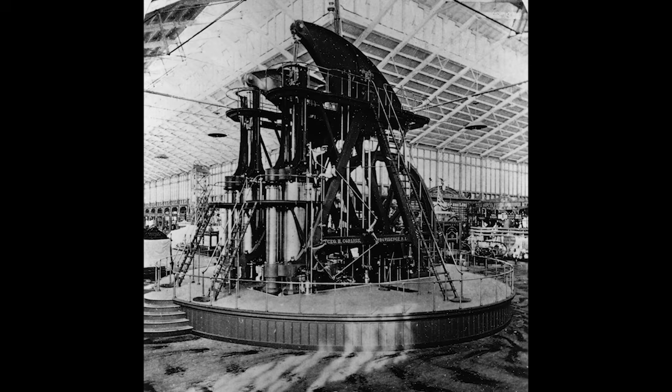May 10, 1876. Philadelphia Centennial Exhibition. The engineering specifications that European steam experts received that morning would challenge everything they believed about reliable industrial power. A 45-foot-tall American steam engine designed to operate at only 36 revolutions per minute, impossibly slow by European standards.

Through the morning mist of Machinery Hall, President Grant and Emperor Dom Pedro of Brazil approached George Henry Corliss's massive creation, while thousands of international observers waited to witness either American engineering triumph or national humiliation.

European slide valves required constant grinding against metal seats, wearing out every few weeks and shutting down entire factories for repairs. The British and German engineers scoffed at Corliss's revolutionary approach, separate steam valves that dropped shut using vacuum cushions instead of grinding metal. No European manufacturer believed such gentle mechanisms could handle serious industrial loads.

Yet this quiet former store clerk from rural New York claimed his patient, whisper-soft valves would outlast anything Europe could build. 8,000 miles from European workshops, the most decisive reliability revolution in steam power was about to reveal itself. Not through brute force or grinding precision, but through the systematic gentleness that would redefine what American engineering could accomplish.

The mechanical drawings spread across George Henry Corliss's workshop table told a story that contradicted 30 years of European steam engineering. While British and German manufacturers perfected their slide valve systems through incremental refinements, grinding metal seats smoother, machining tolerances tighter, adding more lubrication points, Corliss had reimagined the fundamental problem. His sketches revealed 4 separate valves per cylinder, each controlled by a central rotating disc he called the wrist plate, eliminating the grinding contact that destroyed conventional engines.

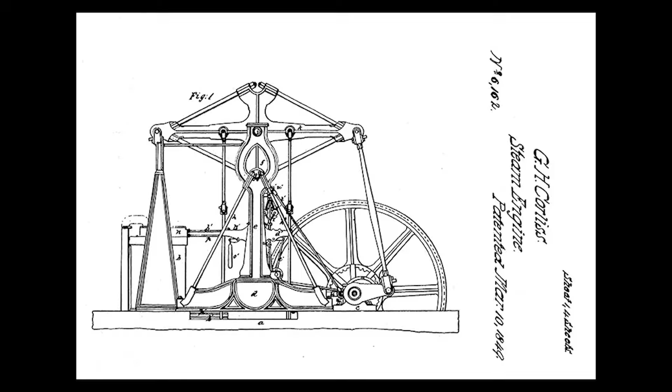The steel mill installation proved the design's scalability. For 6 months, the engine powered rolling mills, blast furnace blowers, and overhead cranes without interruption. European competitors waited for the inevitable breakdown that would validate their skepticism about American engineering methods. Instead, production reports showed consistent output hour after hour, day after day, with maintenance limited to oil changes and routine inspections.

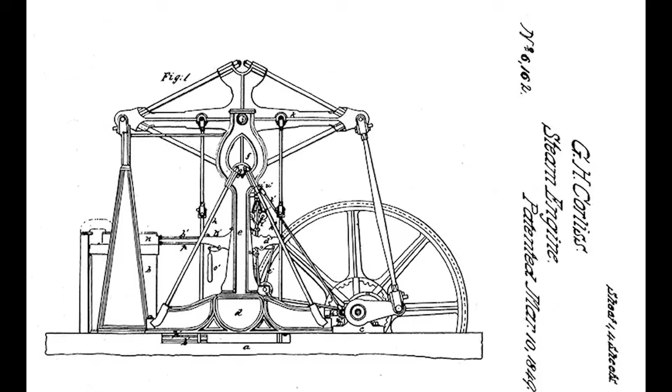The separate valve design eliminated wear patterns that required European engines to shut down every few weeks for component replacement. By 1875, the Corliss Steam Engine Company employed over 500 skilled machinists in Providence, making it one of New England's largest industrial employers. European manufacturers began sending technical observers to study American methods, abandoning their public dismissal of colonial engineering in favor of private investigation.

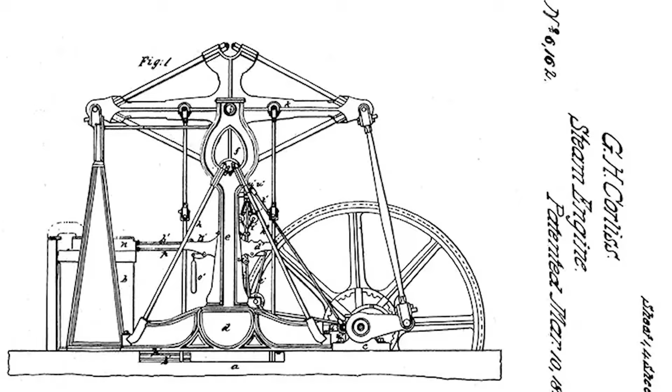The fundamental question that had driven Corliss's innovation, how to eliminate valve wear rather than simply manage it, had produced a mechanical solution that outperformed European approaches through patient precision rather than brute force grinding. The stage was set for the ultimate validation that would determine whether American engineering innovation could prove itself before the world's most demanding industrial audience.

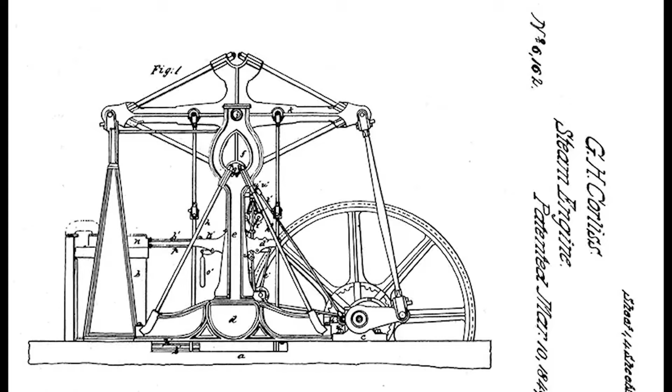The morning of May 10, 1876, arrived with Philadelphia wrapped in unseasonable spring fog that muffled the sounds of 10 million visitors converging on the Centennial Exhibition. President Ulysses Grant stepped from his carriage at precisely 10:45, his weathered face betraying no emotion as he surveyed the massive structure of Machinery Hall. Beside him, Emperor Dom Pedro of Brazil adjusted his formal military uniform, both men acutely aware that the next hour would either validate or humiliate American industrial ambitions before the world's most critical engineering audience.

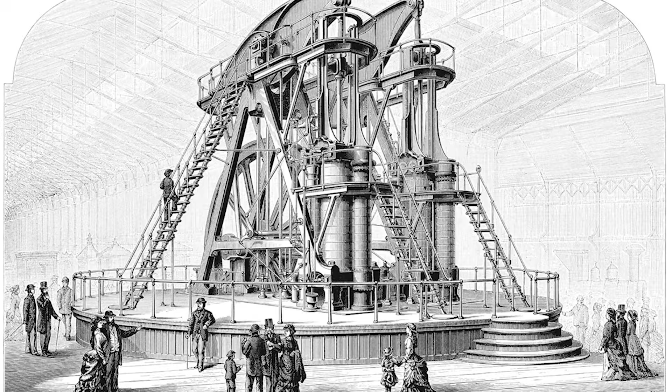George Henry Corliss stood beside his towering creation, methodically checking brass fittings and gauge readings with the deliberate precision that had defined every aspect of the engine's construction. The machine rose 45 feet above the exhibition floor, its 56-ton flywheel motionless but radiating potential energy like a coiled spring. Steam pressure had been building in the boilers since dawn, reaching the 200 pounds per square inch required to drive 1,400 horsepower through more than a mile of underground shafting to 800 separate machines scattered throughout the 13-acre hall.

European observers clustered near the roped barriers, their conversations conducted in the confident tones of men who had witnessed countless steam engine demonstrations. Sir William Armstrong stood among the British delegation, his arms folded across his chest as he studied the Americans' mechanical arrangement with barely concealed skepticism. The engine's massive proportions contradicted every principle of efficient steam design that had powered British industry for half a century. 44-inch cylinders operating at only 36 revolutions per minute seemed primitive compared to the high-speed compact engines that drove Manchester textile mills and Birmingham metalworking shops.

The ceremony began with a choir of 1,000 voices performing the specially commissioned Centennial Hymn, their harmonies echoing through the vast iron and glass cathedral of American manufacturing capability. As the final notes faded, President Grant approached the polished brass startup valve that would admit steam to the massive cylinders. His hand paused momentarily on the wheel, understanding that this single motion would either demonstrate American engineering superiority or confirm European suspicions about colonial mechanical competence.

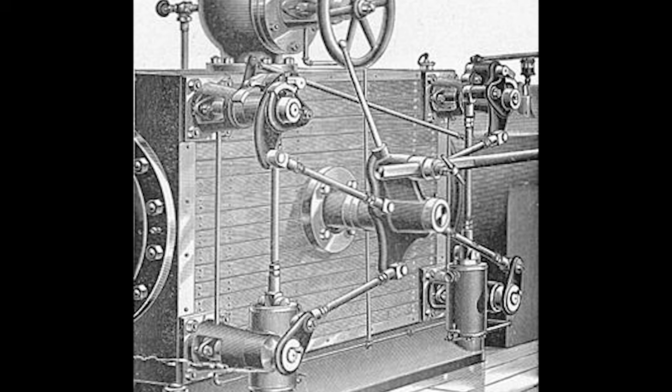German engineers pulled out pocket watches, timing the flywheel's rotation and calculating the mechanical advantage that delivered consistent power to distant machines through seemingly impossible transmission distances. French metallurgists examined the engine's components, searching for the superior materials that must explain its smooth operation, only to discover conventional iron and steel manufactured in American foundries using techniques they considered inferior to European methods.

The true revelation came as hours passed without the mechanical degradation that characterized European steam demonstrations. British slide valve engines typically showed measurable power loss within 30 minutes of startup, as grinding surfaces wore microscopically smaller grooves that altered timing relationships. The Corliss engine maintained absolutely consistent output hour after hour, its separate steam and exhaust valves operating in thermal equilibrium that eliminated the expansion cycles destroying conventional designs.

William Dean Howells, the prominent American writer, captured the international atmosphere in his dispatch to Atlantic Monthly, describing the engine as rising loftily in the center of the huge structure, an athlete of steel and iron with not a superfluous ounce of metal on it. His words reflected the growing recognition among European observers that American engineering had achieved something unprecedented, industrial power that combined massive scale with unprecedented reliability through mechanical principles that contradicted established wisdom.

As afternoon shadows lengthened across Machinery Hall, the Corliss engine continued its steady operation, while European competitors privately acknowledged that their fundamental assumptions about steam power had been challenged by colonial innovation they could no longer dismiss as primitive experimentation. The patient precision of American engineering methods had proven itself before the world's most demanding technical audience, setting the stage for the ultimate industrial test that would determine whether such gentle mechanical principles could survive the brutal demands of continuous factory operation.

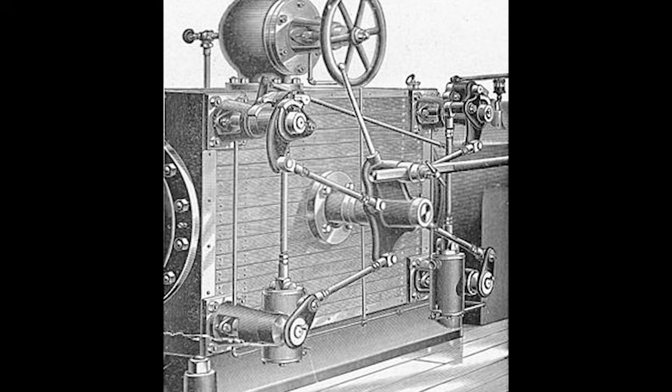The Centennial Engine had charmed crowds and silenced European skeptics, but Pullman's Chicago factory would test whether gentle precision could survive the relentless demands of continuous industrial production. The financial stakes dwarfed any previous steam engine sale in American history. $100,000, equivalent to nearly $3 million in future currency, represented not merely a purchase, but a validation that would determine whether Corliss's revolutionary principles could scale from exhibition spectacle to industrial reality.

European manufacturers flooded the American market with competing proposals, their sales representatives emphasizing decades of proven slide valve performance in British textile mills and German metalworking facilities. They offered immediate delivery, established maintenance networks, and the security of time-tested technology that had powered European industrial dominance for half a century.

Sir William Armstrong arrived in Chicago personally to oversee the British bid, his confidence bolstered by reports from Manchester factory owners who operated hundreds of slide valve engines with predictable maintenance schedules. His technical presentation emphasized the mathematical certainty of wear patterns that allowed precise scheduling of valve replacements every 6 to 8 weeks. European engineering had mastered the management of inevitable mechanical degradation through systematic component replacement and preventive maintenance protocols that minimized unexpected shutdowns.

George Henry Corliss faced the most critical decision of his career as he studied Pullman's requirements in his Providence workshop. No steam engine manufacturer had ever attempted continuous industrial operation at such scale and duration. His own engineers expressed private concerns about bearing wear under constant loading, boiler scaling from uninterrupted operation, and thermal cycling that could fatigue even the most carefully designed components. The separate valve system that had performed flawlessly during 6 months of exhibition duty would face stresses that no amount of theoretical calculation could predict with absolute certainty.

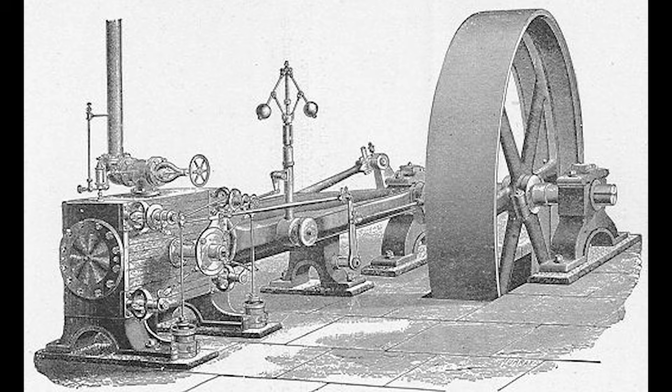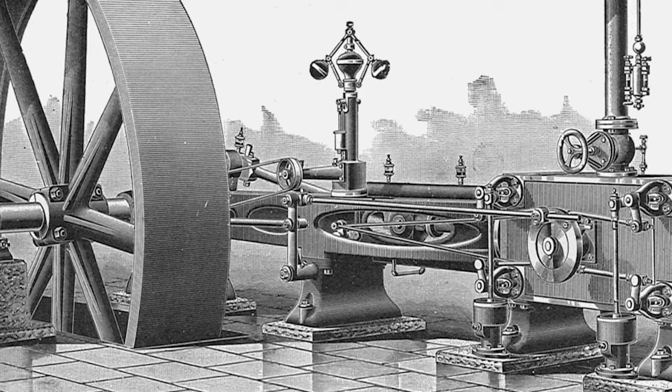Thomas McKnight accompanied Corliss to Chicago for the final technical discussions, his experienced eye evaluating the factory environment that would test every aspect of the separate valve design. The Pullman works operated with industrial intensity that far exceeded exhibition conditions, requiring steam power that could adapt to varying loads while maintaining absolute consistency. Machine shops demanded peak power for heavy cutting operations, then reduced loading for precision finishing work, creating thermal cycles that challenged even the most robust steam systems.

The moment of decision arrived as Pullman reviewed the competing proposals with the methodical precision that had built his railroad empire. European manufacturers offered proven technology with established maintenance protocols and predictable operating costs. Corliss promised revolutionary reliability based on mechanical principles that eliminated traditional failure modes through engineering innovation rather than scheduled replacement. The choice would determine whether American industrial engineering could prove itself through patient precision or whether conventional European wisdom would prevail through the security of established methods.

April 23, 1881, dawned cold and gray over the sprawling Pullman Palace Car Works as Florence Pullman stepped carefully across the factory floor, her silk dress a stark contrast to the industrial machinery that surrounded her on every side. Her father had chosen her for this ceremonial moment not merely for symbolic reasons, but because she possessed the mechanical curiosity and steady nerve required to initiate the most demanding test of American steam engineering ever attempted. The massive Corliss engine stood silent in the center of the factory, its 45-foot height dwarfing even the largest railroad car frames that would soon depend on its continuous operation for their construction. George Mortimer Pullman watched his daughter approach the brass startup valve with the same methodical attention he applied to every business decision that had built his railroad empire.

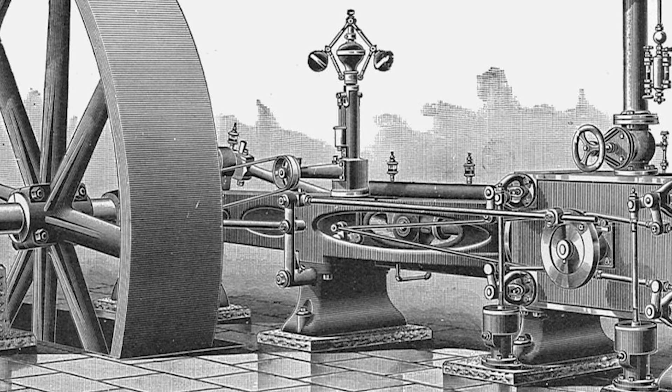30 years of steam engine operation had taught him that bearing wear typically announced itself through microscopic changes in rotational smoothness long before visible damage occurred. European slide valve engines developed characteristic grinding sounds within hours of startup, as metal surfaces began the inevitable wear process that required scheduled shutdowns for component replacement. The Corliss engine operated with whisper-quiet precision that made diagnostic listening almost impossible.

The first 24 hours passed without incident. Then the first week, then the first month as factory production reached levels that exceeded Pullman's most optimistic projections. The separate valve design maintained absolutely consistent steam delivery regardless of varying industrial loads, powering metal-shaping presses during peak demand periods, then smoothly reducing output for precision finishing operations without the power fluctuations that plagued conventional steam systems. European observers arrived periodically to document the inevitable breakdown, only to find the engine operating with the same mechanical precision that had characterized its exhibition performance.

Production statistics validated Corliss's theoretical predictions with remarkable accuracy. The Chicago factory manufactured luxury railroad cars at rates that far exceeded European railway equipment facilities, largely because the reliable steam power eliminated production interruptions caused by engine maintenance. Pullman's workforce expanded from 800 to over 4,000 employees as orders flooded in from railroad companies that demanded the quality and delivery reliability that only continuous manufacturing operation could provide.

The gentle precision of American steam engineering had created industrial capacity that European slide valve technology could not match through conventional methods. European manufacturers watched their American market share erode as factory after factory converted to Corliss-type engines that promised continuous operation without scheduled maintenance shutdowns. British engineers began privately questioning the fundamental assumptions about steam valve design that had dominated their industry for decades. The grinding contact that they had accepted as inevitable seemed increasingly primitive compared to the cushioned precision that American innovation had achieved through patient mechanical refinement rather than brute force engineering.

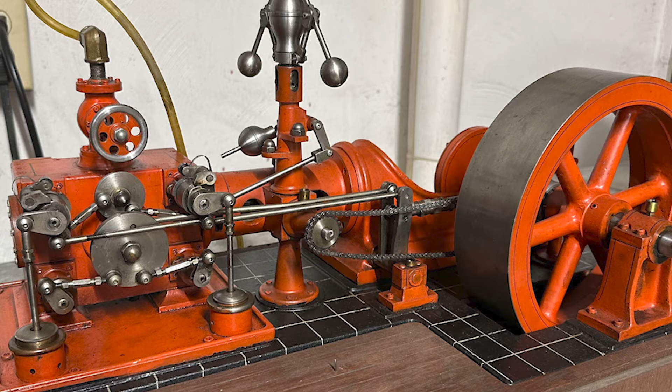The financial impact transformed the Corliss Steam Engine Company into America's largest steam manufacturer, as orders arrived from every industrial center in the expanding nation. European competitors found themselves competing not merely against superior American technology, but against proven reliability that eliminated the maintenance costs and production interruptions that made their slide valve engines increasingly expensive to operate. Factory owners calculated that Corliss engines paid for their higher initial cost within months through reduced downtime and consistent power delivery that maximized manufacturing output.

By the engine's first anniversary of continuous operation, European technical journals began publishing analyses that reluctantly acknowledged American engineering superiority in steam valve design. The patient precision that had seemed primitive to observers accustomed to high-speed grinding mechanisms had proven more durable than conventional wisdom suggested possible. American industrial philosophy had demonstrated that eliminating wear through mechanical innovation produced better results than managing inevitable degradation through scheduled component replacement, establishing a foundation for continuous operation that would redefine global expectations for industrial steam power reliability.

The morning of March 15, 1910, arrived with the same industrial rhythm that had characterized the Pullman Palace Car Works for nearly 3 decades of continuous operation. Thomas McKnight, now 67 years old and bearing the title of chief engineer, walked slowly around the massive Corliss engine that had defined his professional life for 29 years of flawless service.

His weathered hands traced the same brass fittings he had inspected thousands of times, searching for signs of wear that had never materialized despite 262,800 hours of continuous operation, a duration that exceeded the entire working careers of men who had started as apprentices when the engine first whispered to life. The decision to decommission America's most successful steam engine had nothing to do with mechanical failure. Electrical power generation had transformed industrial manufacturing with an efficiency and flexibility that even Corliss's revolutionary design could not match.

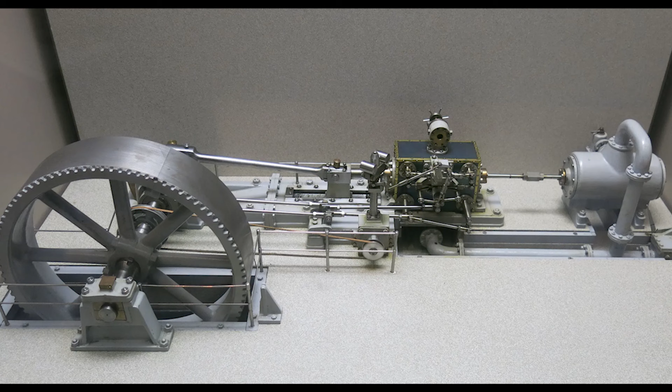McKnight supervised the careful documentation of every component as the disassembly process revealed the remarkable condition of mechanisms that had operated continuously since 1881. The vacuum dashpot showed virtually no wear after cushioning millions of valve closures with the same gentle precision that had impressed Centennial Exhibition visitors. The wrist plate mechanism maintained perfect timing relationships despite mechanical stresses that would have destroyed slide valve systems hundreds of times over. Original bearing surfaces remained smooth and true, requiring only routine lubrication to maintain the whisper-quiet operation that had characterized the engine throughout its extraordinary service life.

The comparison with modern industrial equipment provided sobering perspective on the relationship between speed and reliability in mechanical design. Contemporary steam turbines operating at 8,000 revolutions per minute could generate more power from smaller installations, but their high-speed rotation created thermal stresses that caused catastrophic failures within hours of lubrication problems or cooling system malfunctions. The delicate balance between rotating assemblies and stationary housings allowed no tolerance for thermal expansion or mechanical misalignment that could be accommodated through slower, more patient mechanical principles.

European technical journals published detailed analyses of the Corliss engine's extraordinary service record, acknowledging that American engineering philosophy had achieved something unprecedented in industrial history. 30 years of continuous operation without major mechanical failure exceeded the combined service life of dozens of slide valve engines that would have been required to provide equivalent power over the same duration. The patient precision of separate steam and exhaust valves had eliminated wear patterns that made conventional steam technology inherently temporary, creating mechanical systems designed for permanence rather than planned obsolescence.